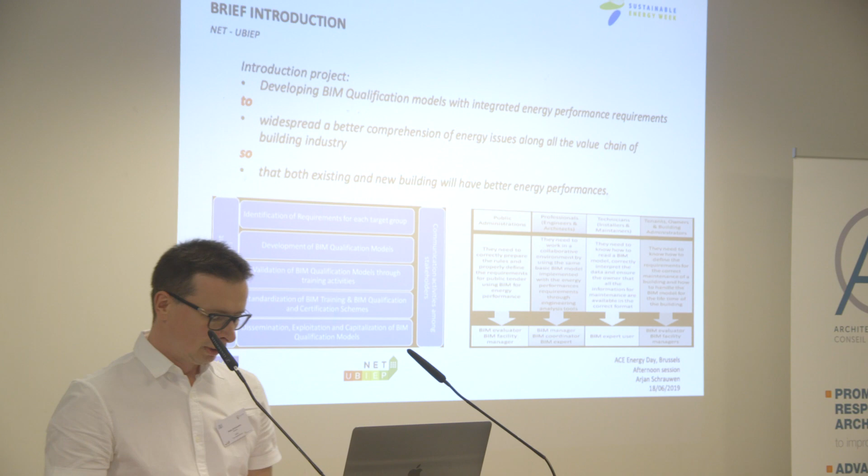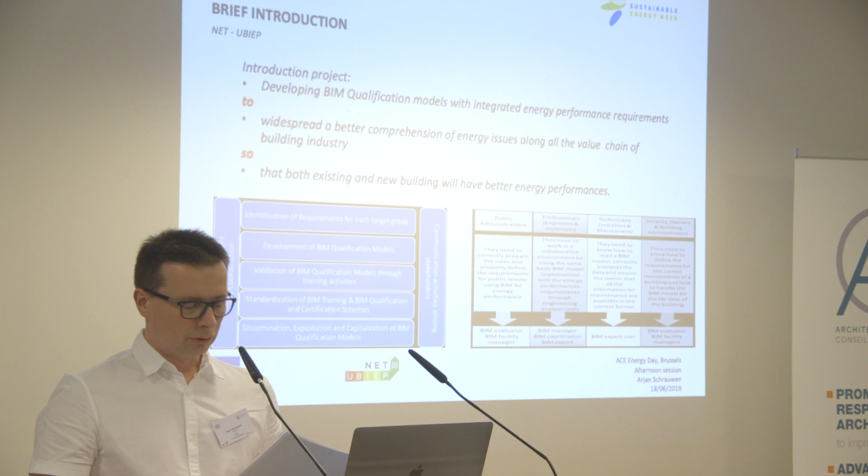I'm part of the NetUBIEP project, Network for Using BIM to increase Energy Performance. What we are doing is developing BIM qualification models that describe the skills and competences for different BIM profiles related to energy performance requirements. Why do we do that? To get a better comprehension of energy issues along the value chain of the building industry, and as a result, both existing and new buildings will have better energy performances.

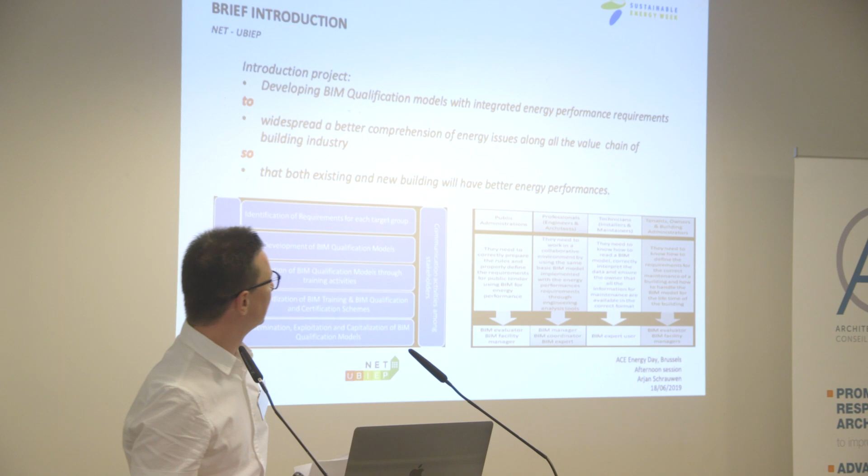In this project we have four target groups, which you can find here in small text. You have the public administration, the municipalities, the local governments. Next you have professionals as a target group - engineers, and most of you, the architects, are part of that. Also technicians - that's where I come back later with the link with BIMplement - the people at the workforce who work with their hands, and the tenants, owners, and building administrators. We mapped those target groups to different BIM profiles, because in every country you have different BIM profiles. In the Netherlands, a BIM manager may have different competences and skills necessary than in Italy. We are trying to get one base for all of them.

We proceeded according to a few steps. First, we identify which requirements each target group has. Next, we develop the BIM qualification models. When we have done that, we validate the models through training activities - so if we emphasized a certain aspect too much, maybe we should reconsider the qualification model. Then we go into standardizing the BIM training and qualification model, and also exploitation and dissemination of the BIM qualification model. At that stage we are searching a link with Building Smart for this.

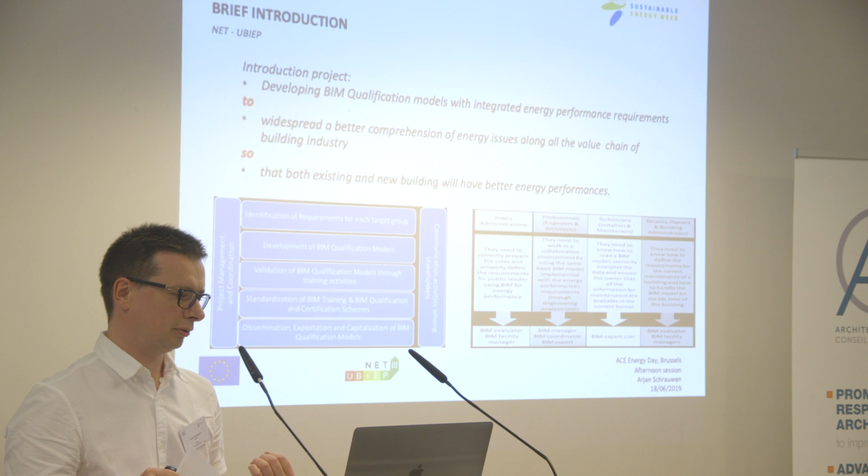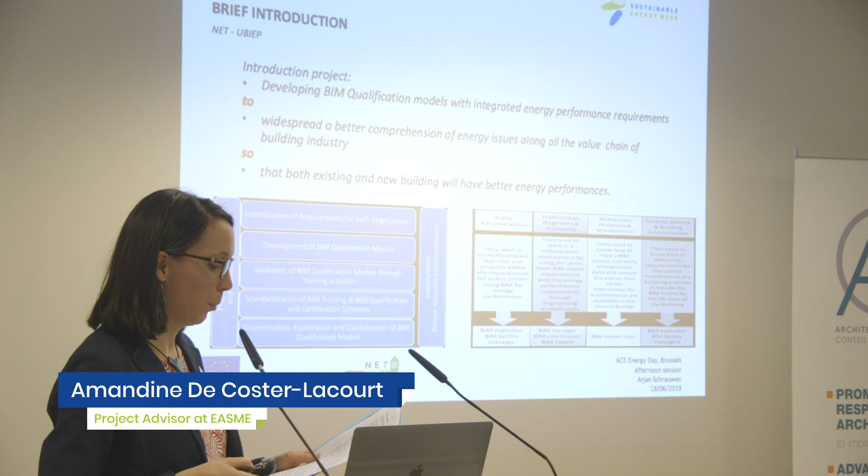Now we will hear about BIMcert, presented by Paul McCormack, who works at Belfast Metropolitan College. Paul has a very robust record of achievement at all levels of management in industry, research, and education, and has been a founder of many startups. He's led highly successful projects and developed curricula for professional courses in many thematic areas, including renewables, digital design, energy efficiency, cybersecurity, IoT, and smart cities. Paul, you have the floor.

BIMcert is a definition of all of our partners looking to see how to make something work. The definition of insanity is to keep doing the same thing over and over again and expect different results. We all know the benefits of BIM - it's been displayed in all the projects across Europe and all different build-up and different initiatives.

But the breakdown in the supply chain is getting it into the blue-collar workers and getting those people that you want to implement the BIM strategies on the site to actually volunteer to take on training. Now, it doesn't matter what nationality you are, be you Irish, British, German, French, Dutch, whatever. The hardest people to find to get to training are those that want to avoid it. Nobody will put their hand up and volunteer, because in many cases your blue-collar workers could have levels of illiteracy where they can't read or write. You're asking them to take on digital tools, when their only access to digital tools is watching their children at home on mobile phones. You bring them into an area they're not comfortable with, and you're asking them to do it on top of their day job. That hasn't worked to date.

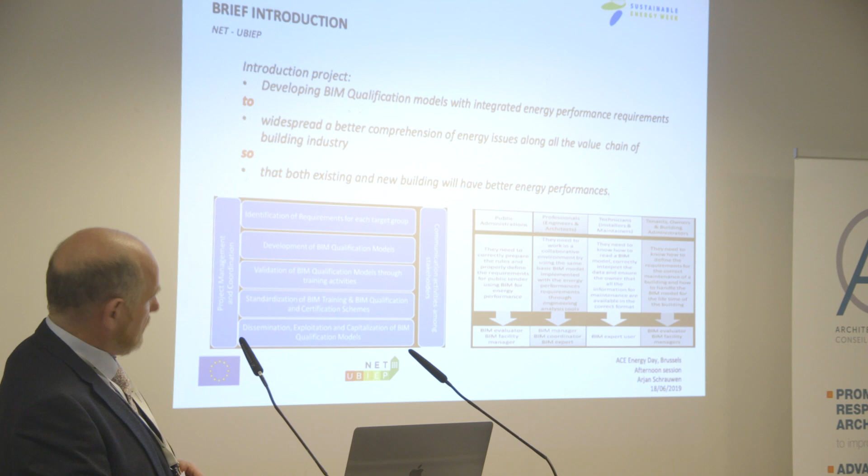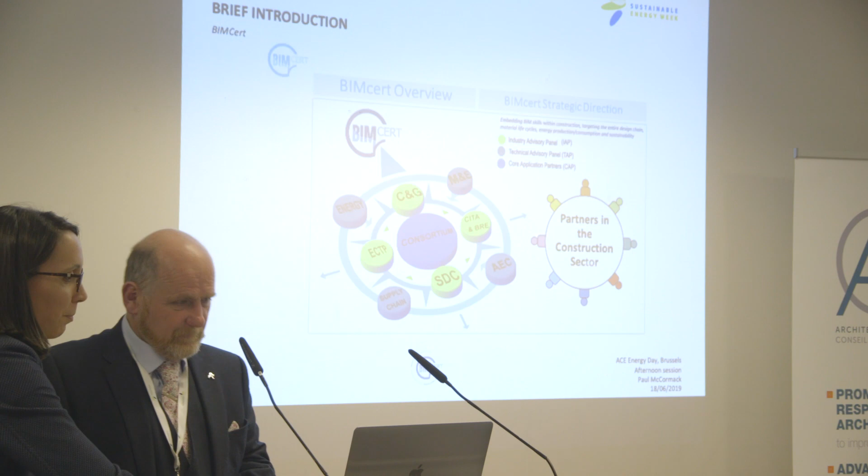No. I'll give you that, yeah, that's good. That's not mine. No, no, oh, you had only that one slide, I'm afraid. One slide, yes. Oh sorry, sorry, well my apologies, my apologies.

But that's why we are doing what we're doing with all of our partners, is to try and overcome the blockages in the supply chain. And the blockage in the supply chain is to get the people, that blue-collar worker, to identify and take on the training in a manner that suits them, in a model that suits them, and in a time that suits them. So make it blended, make it digital, and make it time-friendly for them, and get the owners to accept it. That's where the technical advisory panel come in. Historically, two of the worst industries in the world for investing in training are agriculture and construction. They're no different, and that's what BIMcert is looking to address.

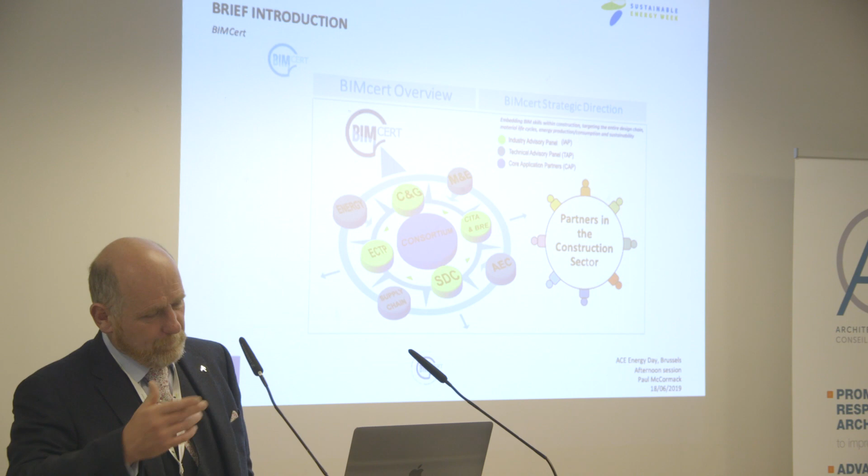We're partnering with the other 3 BIM projects under the current EUSEW projects, and we've started what we call BIM Alliance. It's not a closed loop - it's looking to see what everybody's been doing in different parts, combining efforts and getting the best results. Thank you.

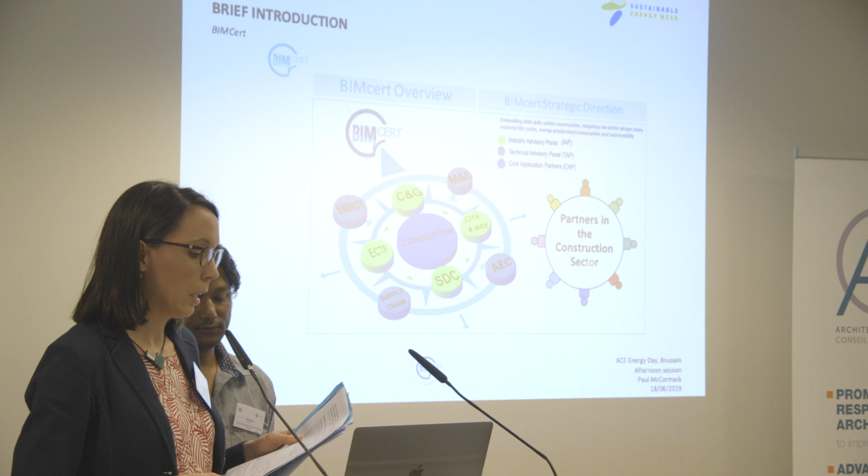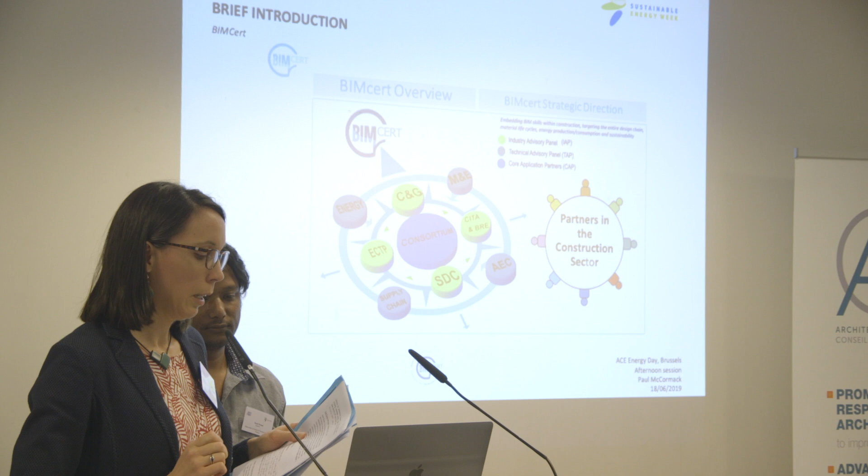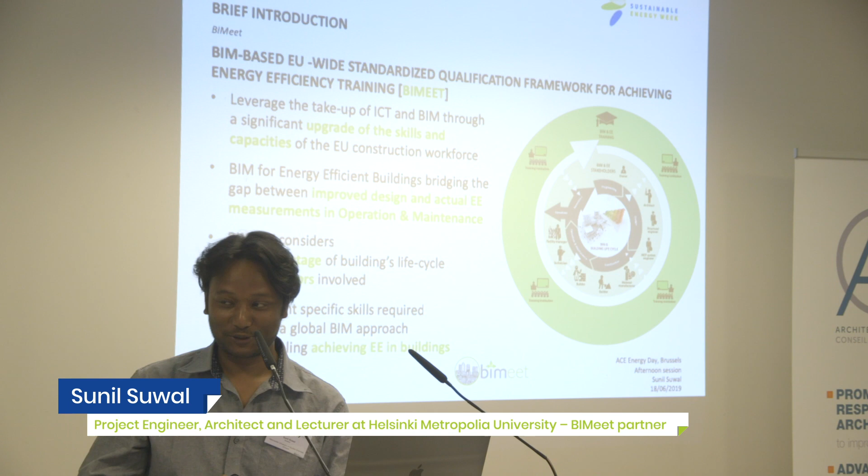So basically Paul and others have already told us what this BIM and skills means, and our project mainly focuses on training for both BIM and energy efficiency, and a way to harmonize it across the EU. Everybody knows that we have this demand for skilled workforce in our construction sector, but there is no common framework to combine all of these people into one, saying that the person who has some skills in the architectural profession in Finland can go and work in other countries with the same kind of frame or skills that he has. So basically our focus is to establish an EU-wide standardized, harmonized qualification framework that could support mobility of different professions across the EU.

And in our project, the stage of the building life cycle is focused, as well as all the actors. We are primarily also focusing towards white collars and blue collars of the workers. The technology part is already there, but it's not yet mature, and the same is true for the maturity level of individual skills and competencies, which I'll talk more about in challenges and opportunities. Thank you.

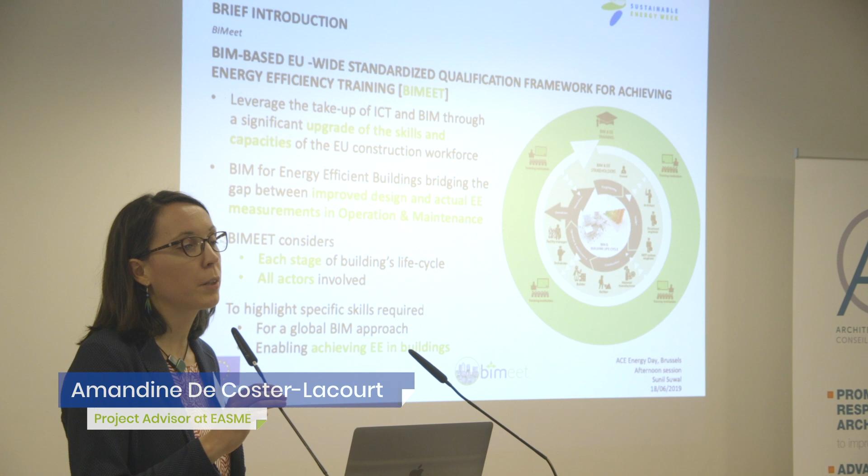Thank you. So you've all been very good with the time, so we're actually even early. Now we open the floor for a couple of questions, immediate reactions to these 4 introductory presentations you may have. Anything you'd like to ask to the presenters? It's more clarifications, and then we'll go into the discussion later in the session. Well, if there are no questions, we assume everything was crystal clear.

Now we will go more in depth, looking at the training experiences on the ground in 3 countries. We will start with France.

Yes. Yes. And yeah, yeah, okay. Yes, sorry if something was unclear. Yes. Okay, sorry, yes indeed. Now we will explore more in depth the four projects after the introductory presentation. I was jumping ahead to the actual demonstration on site. So I give the floor again to Henri.

So the four of us are going to talk about challenges and opportunities. As far as BIMplement is concerned, the challenge is to achieve improved quality for NZEB construction and renovation. That's the base, by setting up large-scale training using BIM both as a tool for an enhanced qualification scheme and also as an on-site tool for better understanding of the work to be implemented. BIM as a tool to communicate between different crafts.

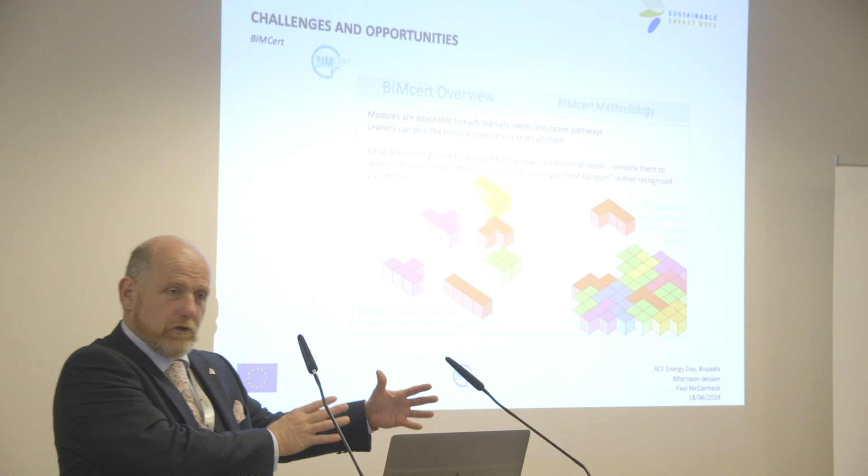Because we can talk about the blue-collar workers not being educated or not having the training, the public servants at the top end in the civil service in the different countries need similar training, because if they're putting out public contracts, they have to understand what they're asking for, and to be able to mark and judge that as part of the accreditation.

So the challenges that we've looked at is to make the modules accessible to all. Training and education to date, in the majority, are straight lines. People will start their 3 or 4 year course and after 4 years finish with their qualifications, and if they drop out in between, they have nothing.

So we've got to make what we call the qualification modules bite size. You're not asking somebody like a bricklayer to take on 3 years of work before they get a qualification, you're asking them to take on 60 hours in small modules. Then the modules can be joined together in a system that suits each person - there's the shape, you put your own picture together.

If you're a bricklayer, you need certain qualifications in BIM. If you're a plasterer or a different construction worker, you don't need all of the modules, especially some of the energy modules. You take the bits that suit your career, that suit you and your job, so you don't waste time doing stuff you don't need to do.

If we held a head count here in the room, how many people sat through different courses in their lifetime and have never used the skills they learned? Wasted opportunity, wasted skills, wasted knowledge, wasted time. And if the employer paid for it, it's a waste of expense.

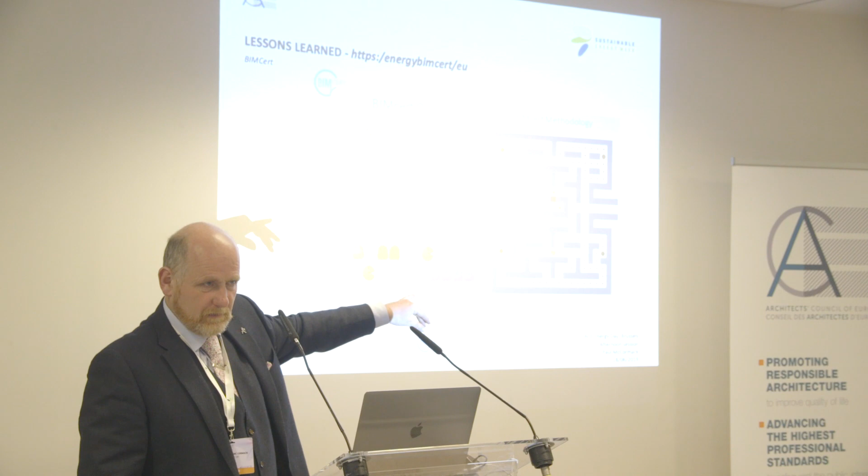And when we're talking with the groups, we make it accessible to them by using this. It's not a straight line where you go for 4 years and get your qualification in 4 years. Stop and start wherever you want in the maze. Make the picture suit yourself. Go back. Apologies to the younger members in the audience who wouldn't understand what Pac-Man is.

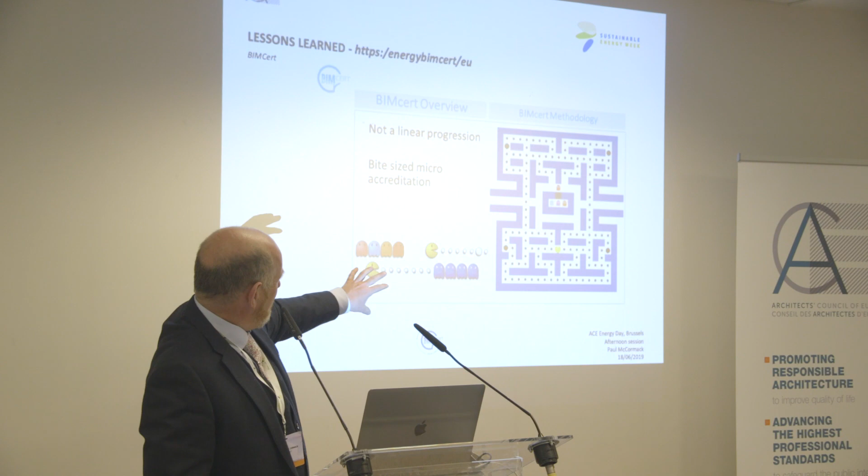I include myself in the older members of the audience. But you get your prize every level you go through. You get your certification, your bite-size accreditation, your digital qualification every level you go to.

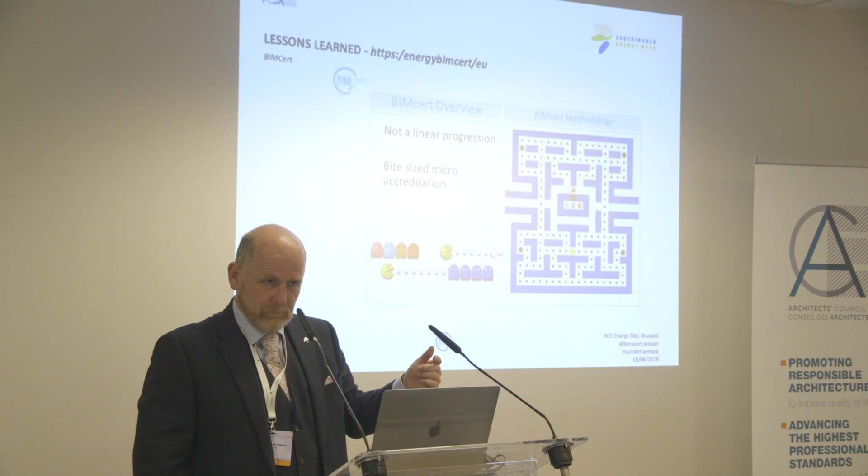And what we want then to build that into is a digital passport. Same as a pilot has to record the hours that he flies, a diver has to record the hours that he dives in order to keep their license. Make it almost like a CPC, a certificate of professional competence, where the workers have their CPC passport. And that's what we've come over.

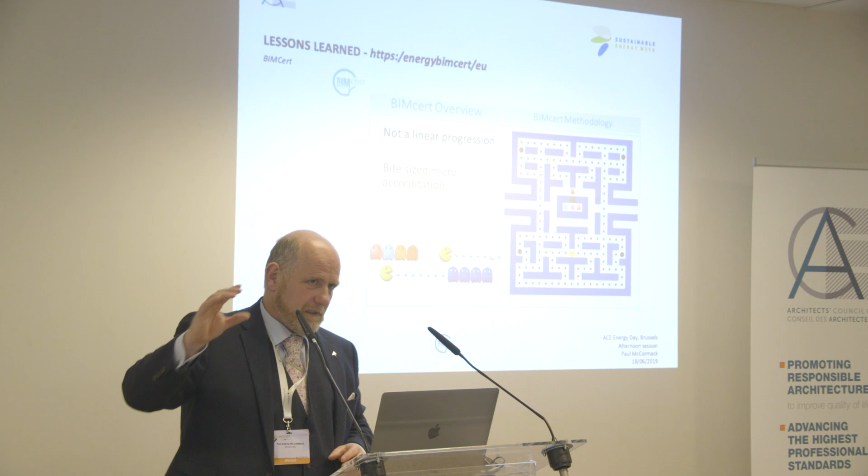It's not linear. So the challenges we have, it's also to get the academics to this, because academics think in straight lines. Because they get paid for white papers, they get paid for qualifications, and they get paid for everything that goes through. It's not just redesigning the construction cycle, it's the training cycle, the academic cycle, and the certification, and making sure that people get on that.

Thank you. Very forward-looking conclusions. And for BIMeet, you have 2 slides. Yes, all right, thank you.

So what we have identified in our BIMEET project is whenever we talk about trainings and education, learning outcomes play an important role. So we have identified and followed this KSC matrix, knowledge, skills, and competencies for the tasks or the responsibility a person has to do.

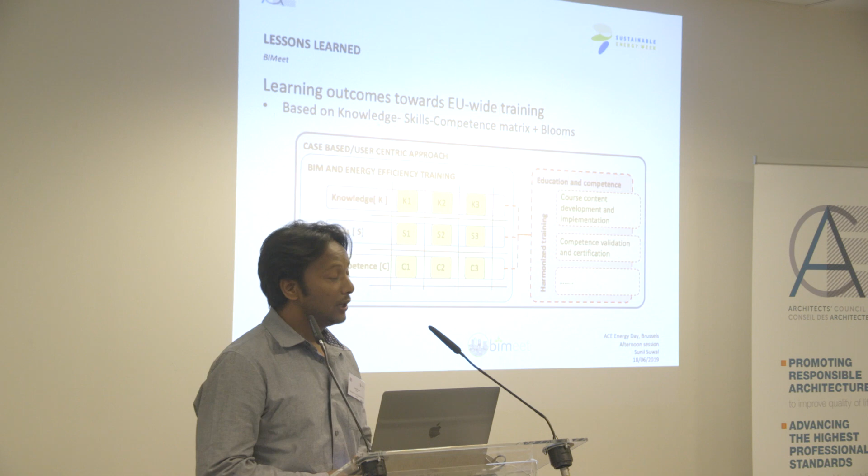And we have used this as a base to develop these education and competence modules, which would further help the trainer and the learner to understand about the course contents, help the trainers to develop these courses as well as to implement it, and use the same criteria for competence validation and certification.

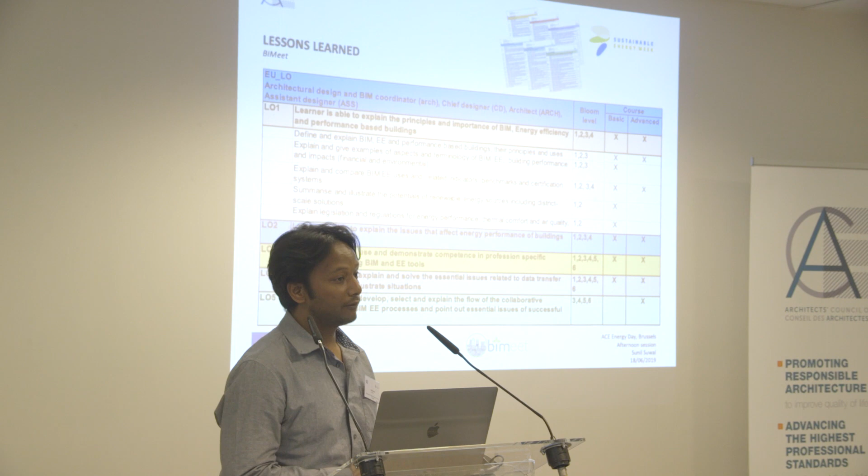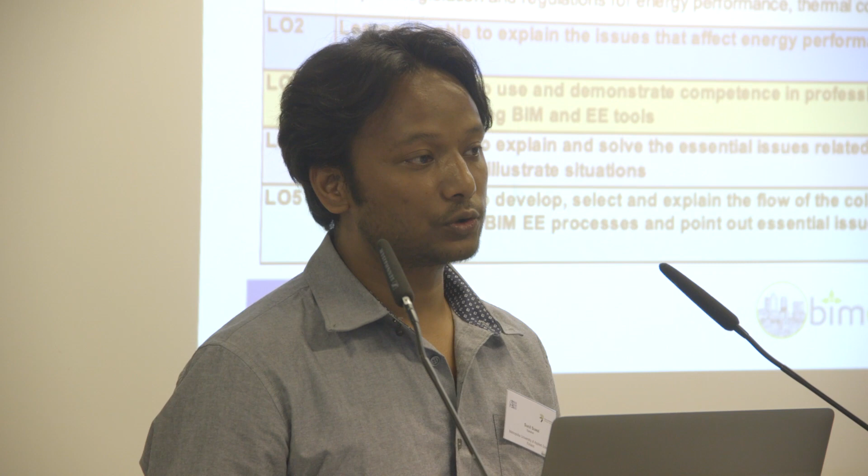Within these processes, by following these aspects and steps, we have identified these different roles, the one that you showed earlier: clients, design disciplines, and the blue-collar workers. So we have identified and developed these learning outcomes, a group of learning outcomes, and we have tried to harmonize it using the EQF levels as well as with support from the Bloom's level to identify if these learning outcomes are to be targeted for a simple basics course or some advanced course.

For example, LO5 states that an architect should be able to collaborate with different design disciplines or different stakeholders. So the sub-learning outcomes support that not only the horizontal integration between different design disciplines is needed, the vertical uplifting or the connection of the skills and knowledges is required in different years.

So in an overall comment, we have identified these learning outcomes for those stakeholders and are on the phase of developing an online learning module to implement this BIM and energy efficiency trainings, which focuses on the basic levels of training. And the continuing discussions are going on with the BIM Alliance group that has been created or merged from these 4 projects to go forward as one through Building Smart or create another European level schemes that is required for implementation.

Thank you. Thank you, Sunil. Quite exciting perspective.

Unless there are really any burning questions, I suggest now we move on. Are there any burning questions? You all seem very, very quiet.

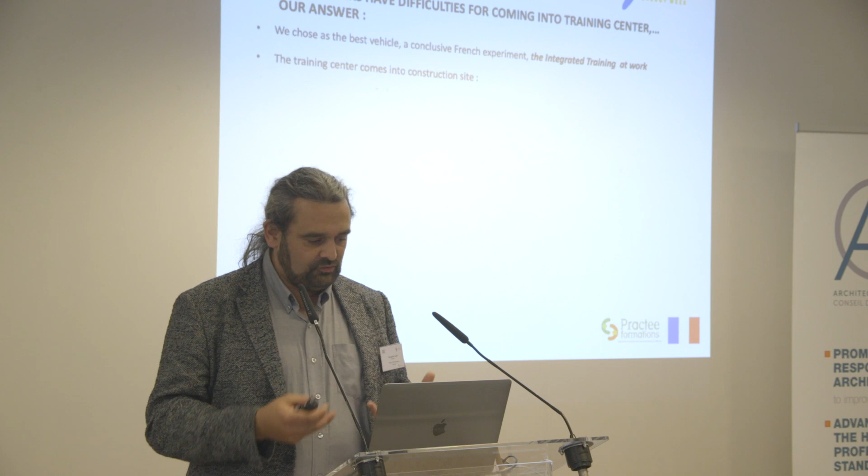First, blue collars have difficulties coming into training centers. We chose, as the best vehicle a conclusive French experiment, the integrated training at work. The training center comes into the construction site. This is a maritime container, which we modified to integrate different kinds of construction.

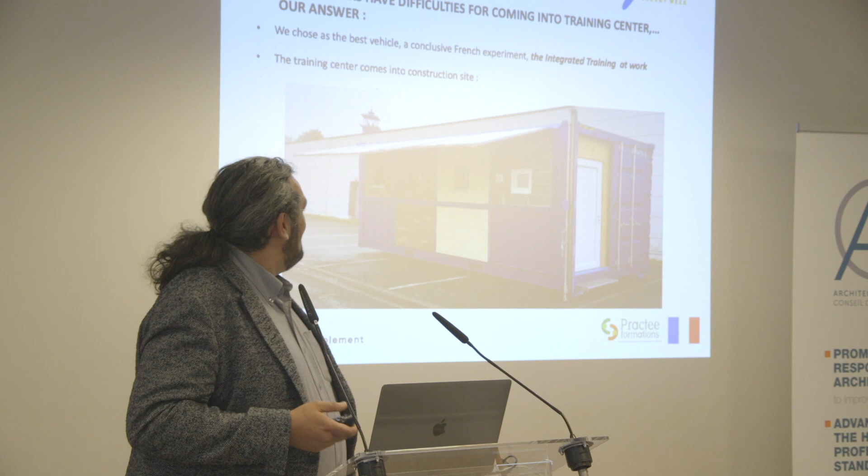The main value: the training center comes into the construction site, as you can see in these different pictures. We try, through several short module methods, to address the difficulties and to facilitate the appropriation of evolving practice.

For the second point, blue collars are reluctant to take trainings. We are developing...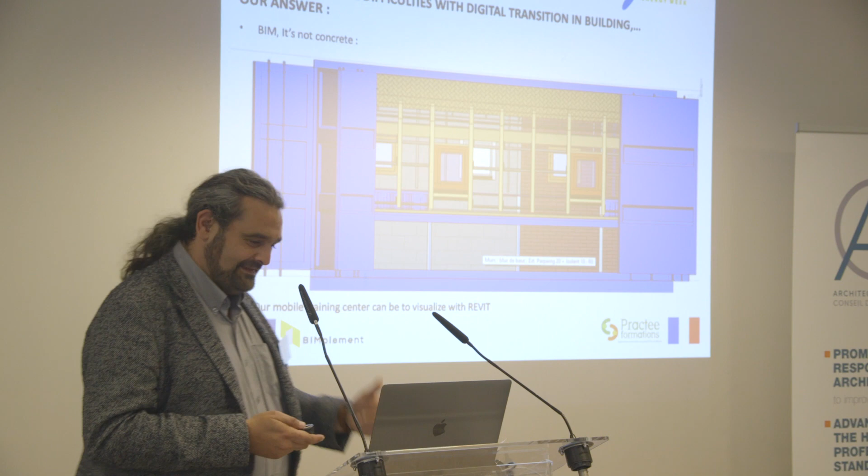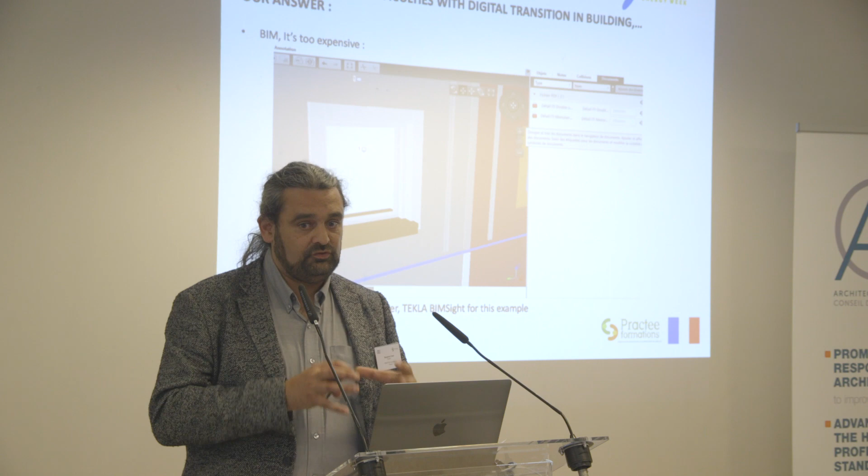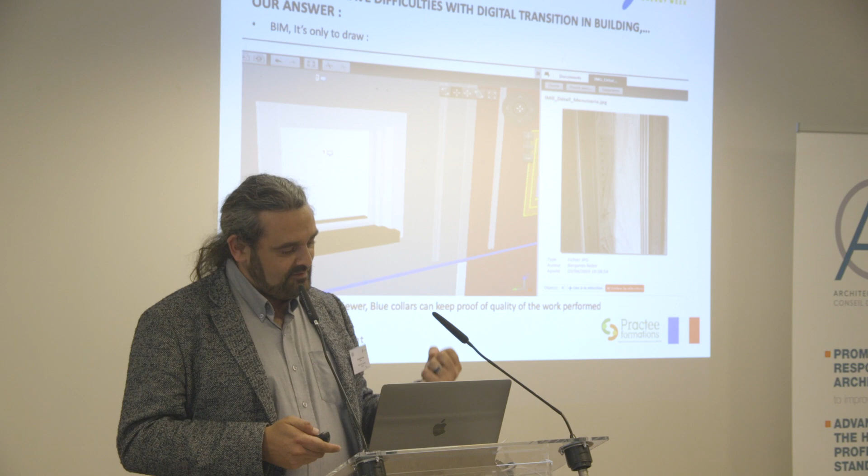BIM is too expensive, so we are introducing into our practices the use of a free viewer. For this example, in French, it's available - it's Tekla BIMsight. It's for our blue collars to facilitate viewing and not to draw or describe, but with the same viewer you can prove the quality of work performed. So it's concrete for our blue collars.

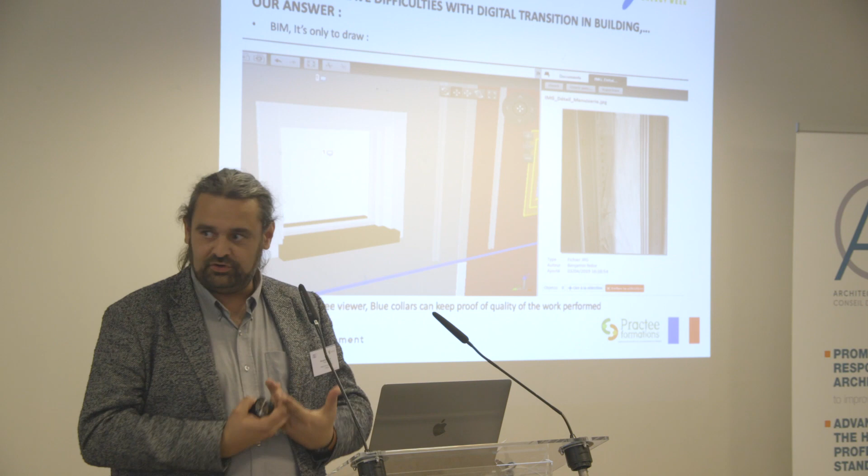Why do participants like this type of blended learning? As you can see, it's approved by a large majority of trainees, 88%. The main reasons for the success: short training sessions in which learners are really actors, short training sessions with more place for practice than theory, and short training sessions that offer concrete answers for our blue collars.

To finish, more information on integrating training at work and the opinions of the participants. We can load a YouTube-like video. It's possible... Perdu. Alors, je pose.

Bah ça. Voilà. Bon. Merci.

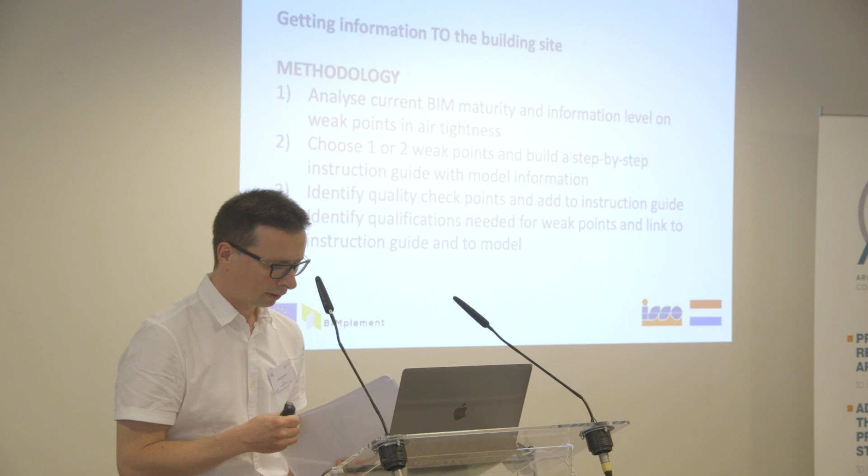After that, we have to build some quality checkpoints in the instruction guides. We trained people in how to build themselves an instruction guide with quality checkpoints. It's more an abstract thing to do for the managers or site managers.

And what you would like to have is a kind of IKEA or Lego manual for the people who are building the project. After this, you can identify some qualifications which are needed to solve the weak points, and link some information to the instruction guide and to the model.

We have some first results, and I don't know if the English term is correct - there's een dakrand, low eaves. That's a big problem in the Netherlands because of leakages, when there's water on the roof and it can't go away. That's the first problem, which is also true for air.

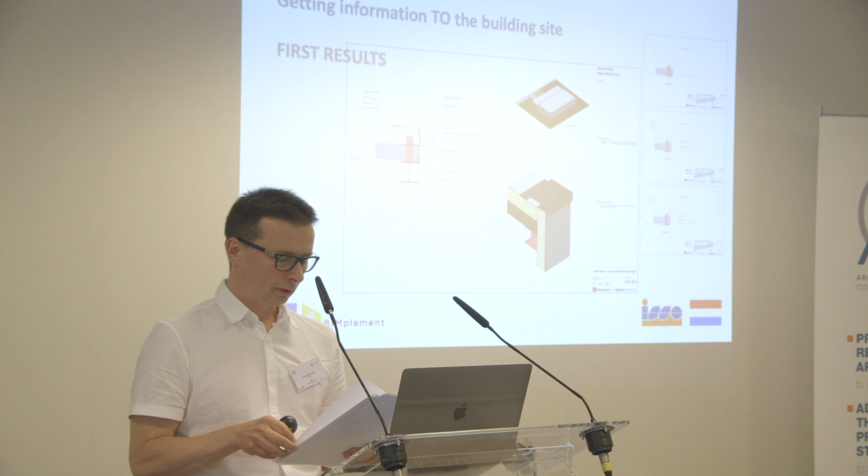The BIM model is more an abstract thing for the technician. It's more like a guideline on how to construct a building, but more small details are overlooked or talked about too easily by the designer, so they have to solve that in the work itself. At first sight, the BIM build is okay, not useful.

And what we're trying to do is get the experience from the technician, from what problems they're having, back to the drawing board. How do you do that?

Always first check how BIM is used in the construction companies. What information issues do they have? How does the information flow in the company?

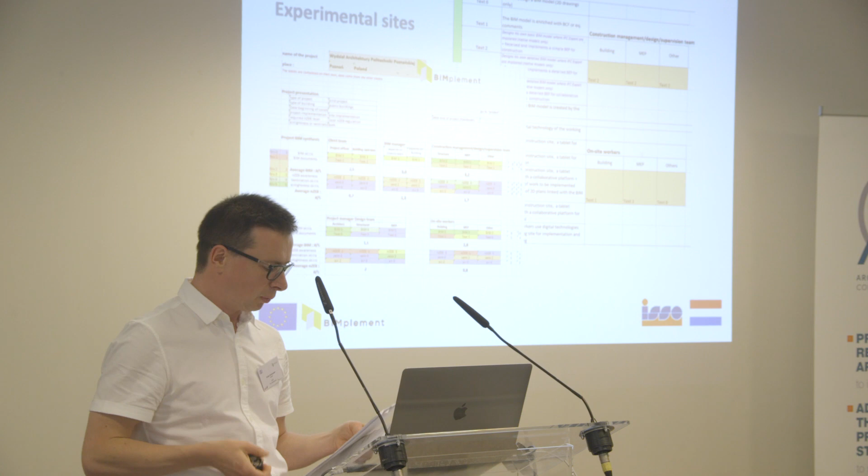This is more into the training pack we use: the field lab results, the work feedback, step-by-step instruction, the use of the BIM viewer. We explained that because it's not very used. NZEB air tightness of ventilation instruction, and the NetUBIEP e-learning module. We are using that for the technicians, and we completed it with videos where we interview someone at the site and film them so it can be used as e-learning material. We also use the Build Up Skills app.

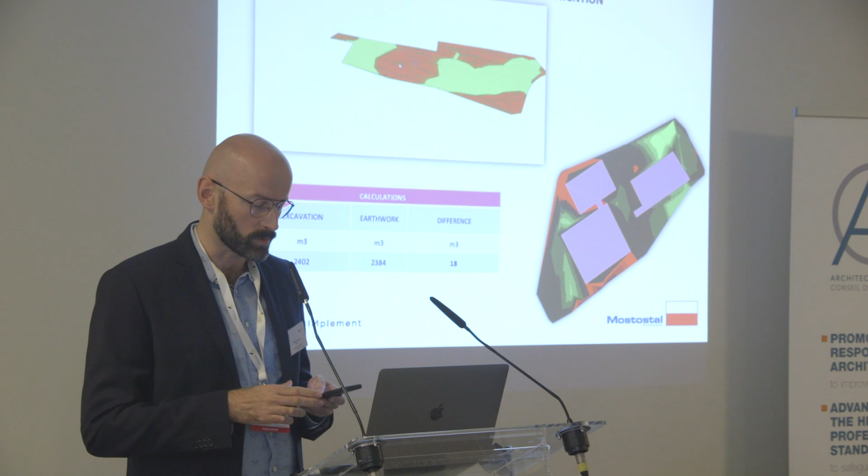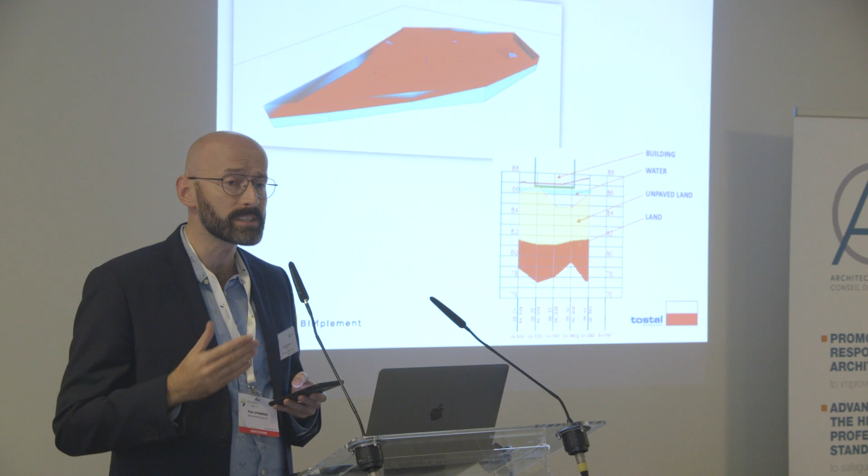However, due to the high level of groundwater, there was a risk of flooding. So based on the geodetic measurements, we created the model and we indicated the level of excavations to be on the safe side.

With this work, we got the attention of workers, and we even got first savings, because we indicated that 200 piles don't have to be built in the ground to construct the fire road. Thanks to this, we got around 25,000 euros of savings, even before implementing BIM on the site. It was only an awareness campaign.

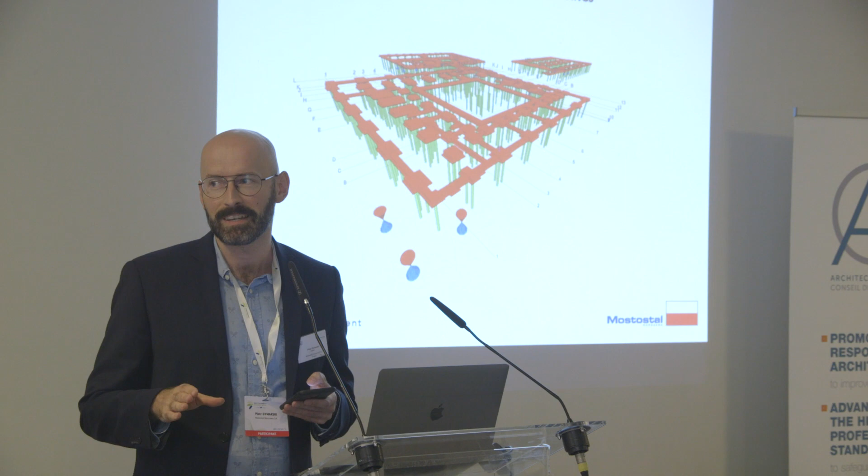So this is like my impact in the BIMplement project. But when we got the attention of the construction workers, then we started analyzing with them the real needs of the construction site.

So we identified some functionalities that could help them in their daily work: browsing the model, getting information from the model, quantity take-off, communication through the platform, and clash detection. But of course, we had to prepare these trainings for them, to teach them how to use these tools.

And in this phase, I started BIMplement trainings. First of all, construction workers don't have to use native files. This is reserved for designers, architects, a BIM coordinator, but when we are talking about the blue and white collar workers on the construction site, they can easily use an IFC file, which contains less information. Then, quantity take-off.

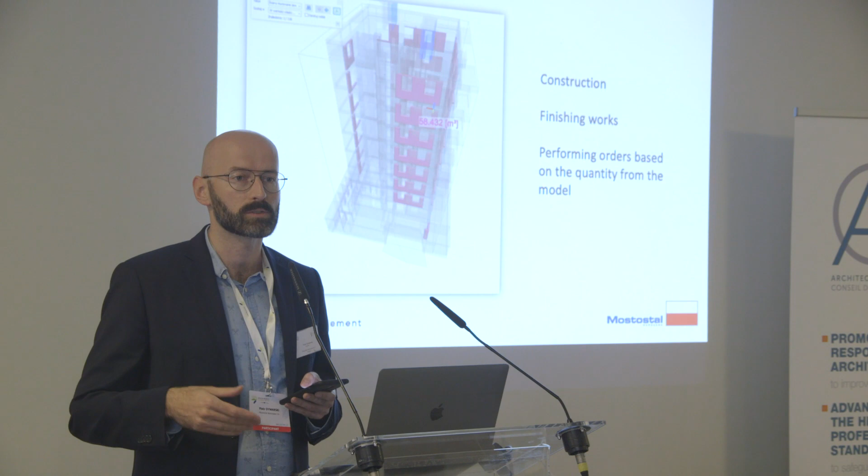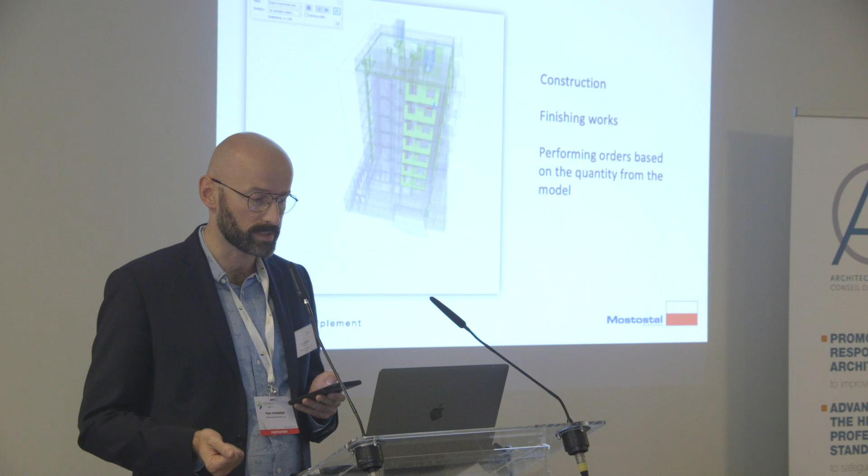Our employees have to count materials to make ordering, or they need to count the work that has been done by our stakeholders. A simple browser with an IFC model can really help them in this work and save time.

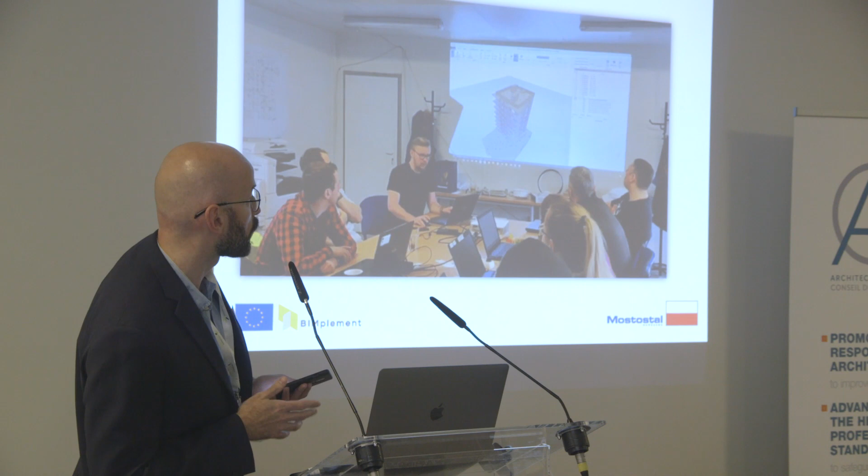On this video, the guy will grab his hands on his head because we counted very quickly the necessary information for him, just in 2 minutes, whereas normally he spent a lot of time counting materials using 2D information.

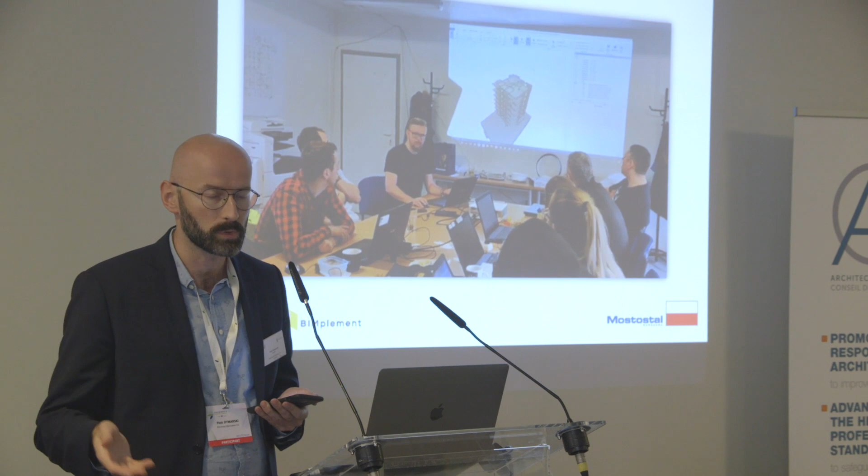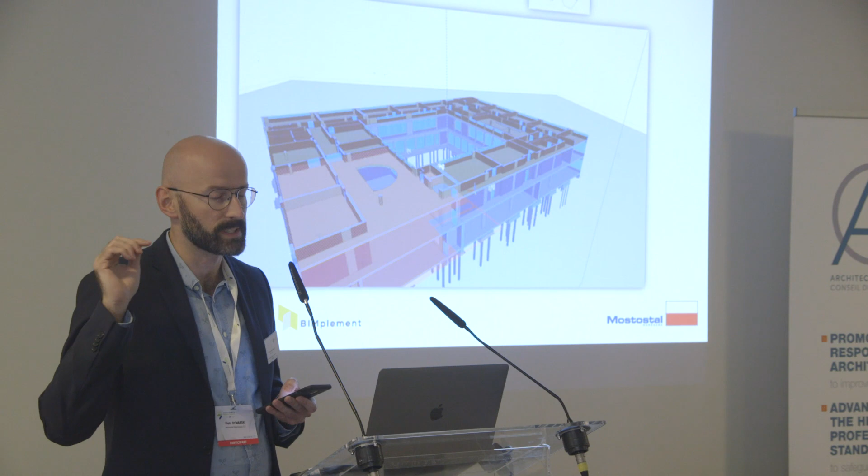What else? We teach them how to search elements from the model. There are hidden logos, M logos, hidden in the building, and they have to use the browser to find these elements. This is the first step.

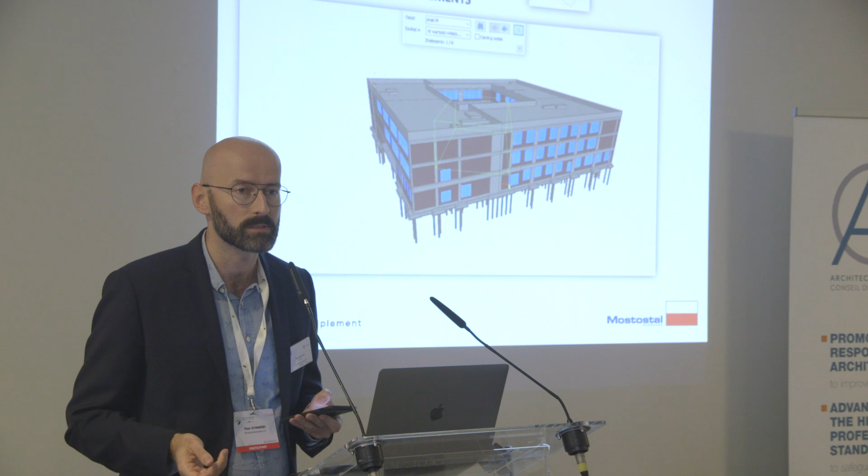But after that, we show them that this work can be done simply by searching the name of these elements. So this is another way to impress them.

Then we go smoothly to the scheduling. We divide our workers into 2 groups. The first one has to construct the building based on 2D documentation, and the second works on a 4D BIM model. Who will be the winners? Of course, it's easy to predict that the second group will be the winner.

But in this exercise, there is a very important thing: the second group knew exactly where they were during the whole construction process, because they worked on the 4D BIM model, and the first group didn't know where they were.

Another important functionality: clash detection. We prepared for them an IFC model, and using the browser, they detected clashes and marked them on a table, on paper. But after that, using specific dedicated software for that, we did it in a more automatic way.

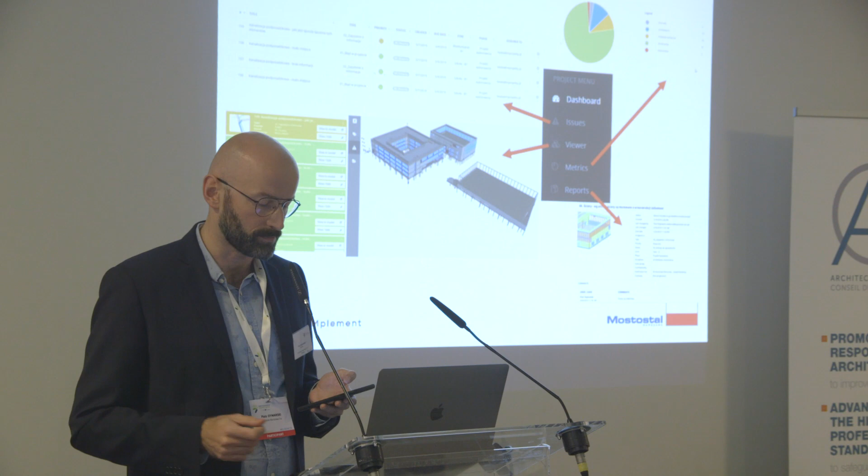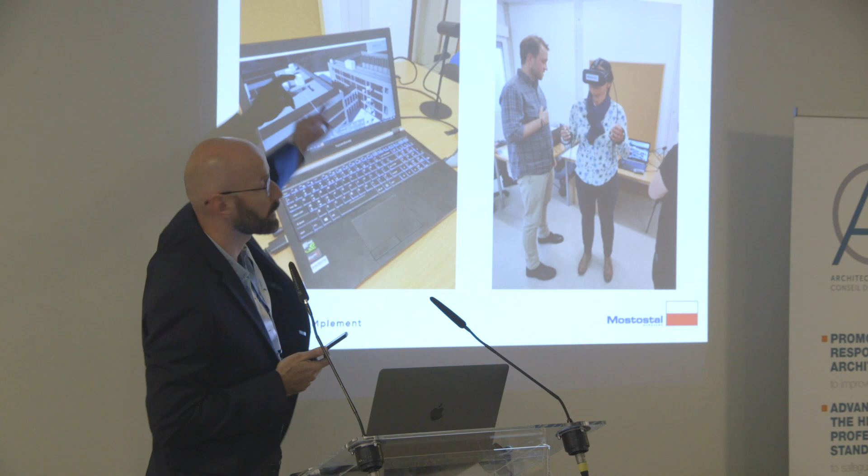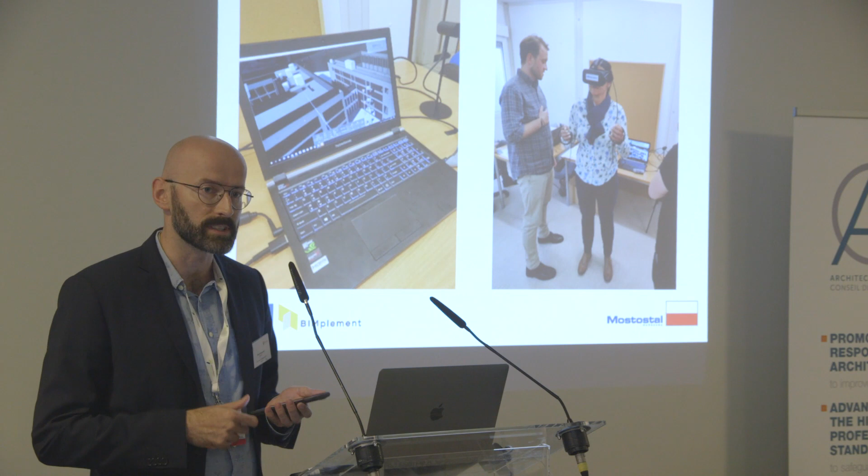When we are talking about HVAC installations, we also make coordination using virtual reality. So this is the roof and ventilation units, and we designed it in the model. After that we ask our workers to take glasses and take a virtual walk, because it was a requirement from the investor that ventilation units cannot be seen from the ground floor. So she or he can have a virtual walk and decide if this unit is correct or not.

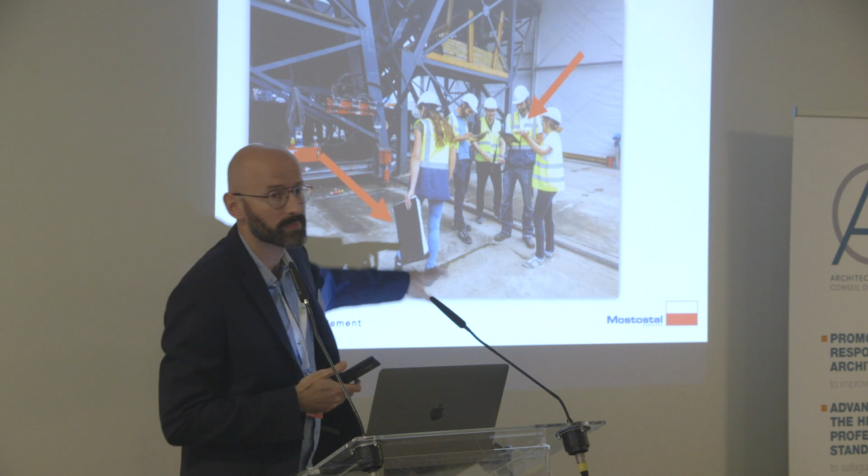And of course, everything we do, we do for digitalization, to replace paper documentation in digital form. And now a very quick summary.

We conduct trainings on the construction site. The duration is about 4 hours because workers have to work. We don't make trainings about the software because it's not interesting. We make trainings about the functionalities. We have to use models from the construction site to arouse interest of the workers, because they want to work on models from their own construction sites.

It's very good to divide people into two groups, one that works in the traditional way and the other in the modern way using BIM models, because then we can easily see the difference and make comparisons. Okay, thank you very much.